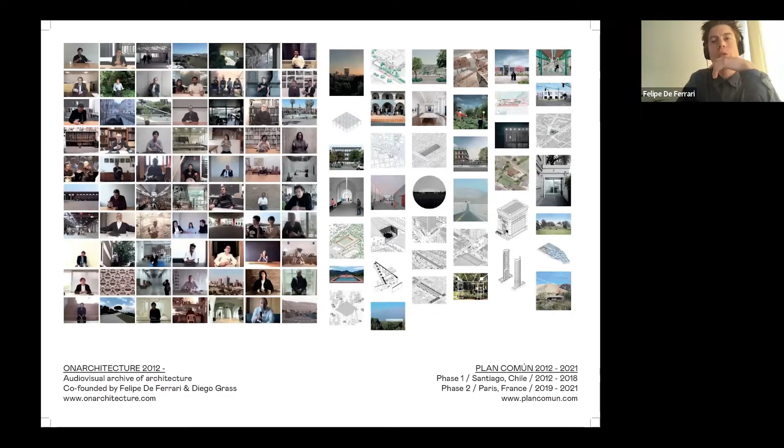So basically, these are two projects somehow: on the one side, a collection of films since 2008, and then a collection of projects we started doing in 2012. As I said, OnArchitecture is an audiovisual archive of architecture.

At the moment, we have around 600 videos. We are producing the last 50 to arrive at 600 videos by the end of April somehow. It's content done by me and another Chilean architect, Diego Grass. As I said, it originally was a student project, and then we continued as professionals, and in a way it allowed us to really approach and get content from first hand.

I would say it's a collection of buildings, portraits, and interviews, all the material produced since 2008. Of course, it has been a super interesting way to approach people we really like, we really respect, and people that have been extremely influential in our thinking.

I'm not talking only about contemporary architects, but also architects mainly from the modern period. And then, trying all the time to enlarge the questions and subjects in which architecture operates—we're not talking only about form, but larger questions. We have been privileged to talk about these questions with many people, with very different approaches and attitudes regarding architecture, from very highly conceptual people to very practical people.

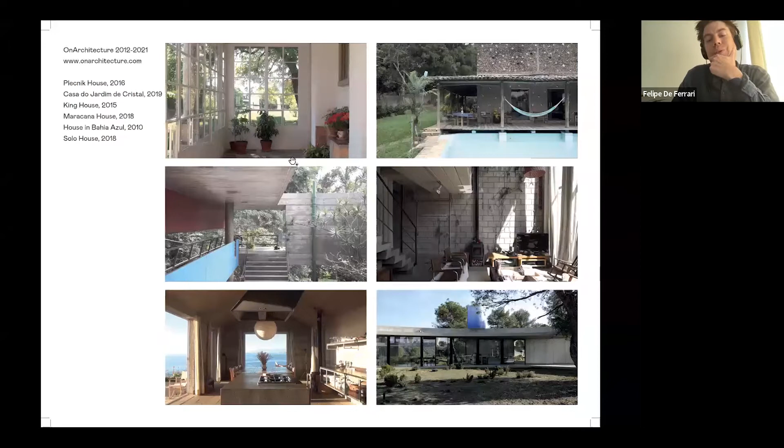This has also allowed us the possibility to visit many places, and to confirm strategies by many architects from South America, from Europe, from Asia, and so on, with this specific interest in collective spaces. This has also been the possibility to look at how we live—in individual houses, but also, especially during the last 5 years with more intensity, how we live in collective housing.

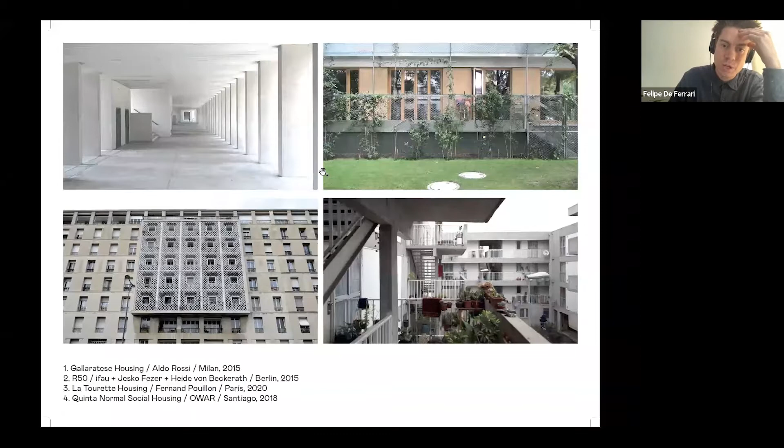This material, all the videos, are available on this site, and I strongly encourage you to visit the website, as Architectural Association has subscribed for the first time during this year, if I'm correct. So basically, that's what we have been doing.

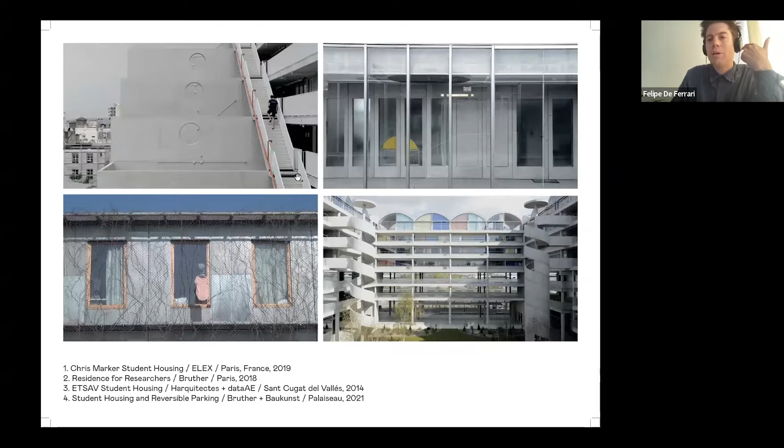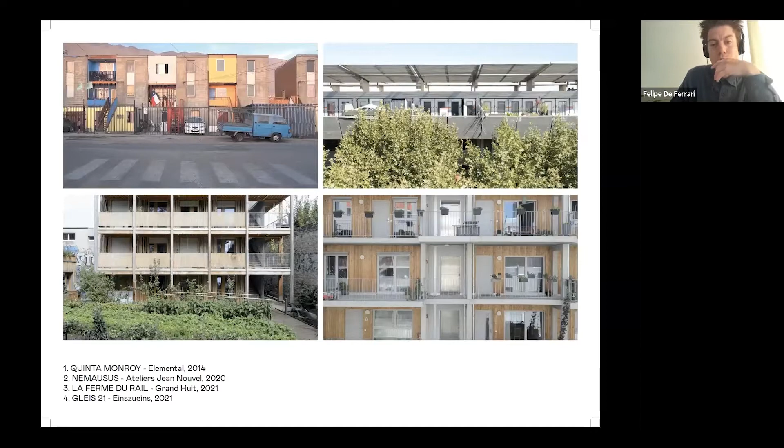During the last 5 years there's been a strong emphasis on housing, and how we live together through many approaches. We have been reviewing and visiting student housing, social housing, real estate housing, and so on—housing in South America, housing in Europe, cooperatives. You already have an idea.

We are also trying to understand the questions and subjects behind some strategies of architecture, meaning we try to really understand the complexity of these spaces, not only from a formal or spatial point of view, but also from a finance point of view, administrative, and so on. There are cases you might know very well.

I'm not sure if Cristina is here today, but of course LACOL has been very important as a kind of practice of our own generation. I still remember visiting the La Borda cooperative when it was a construction site. Then I met Paul for the first time to talk about the process. Then we met Cristina and Carles. Then we came back to see the post-occupancy. So it has been an amazing way to approach architecture and to really see carefully these places, because we spend time there.

This is the basic approach: as we are recording, we spend time, we see details, and we try to do a nice portrait of them. And then, as I was saying, it's also about the conditions.

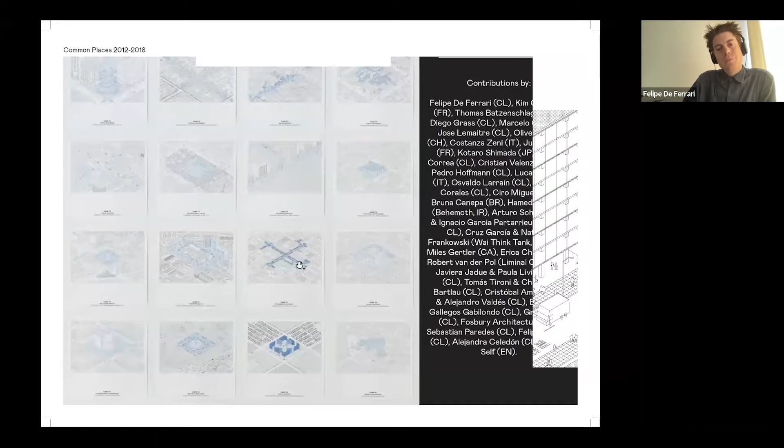And it was a kind of very direct attempt on the question of collective spaces, on how to imagine possibilities for our public spaces and for our collective space, right? So we started this series of 45 strategies that were dealing with many diverse subjects in our cities, let's say, from malls to cemeteries, trying to really improve and reinforce the collectivity through form, through architecture. So we have this.

This was still the first one produced in our studio. It was entitled Public Buildings, and the idea was to really have like squares on air, very simple, as a kind of prototype.

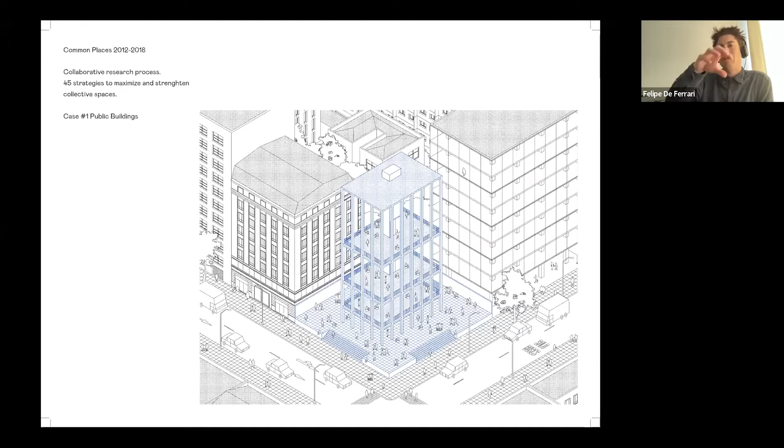And then I have to say also the context, these were not strategies located in a specific context, but everything was somehow created so we could imagine that one strategy could be appropriated and translated in another context, right? The idea was not only, let's say, to say okay, we are architects and we have many ideas and we know how to represent them, but actually...

one of the goals of this research was actually to try to give these inputs to our, well, of course academy, but decision makers and so on and so forth, authorities, in a way to really feed their own parkour and their own universe of possibilities when we are talking about our cities, for example.

This case, for example, I just choose a couple of them, but actually, for example, this one was to create public pools, really swimming pools in the cities without any kind of bureaucracy, without any kind of filter in between the city and the pool.

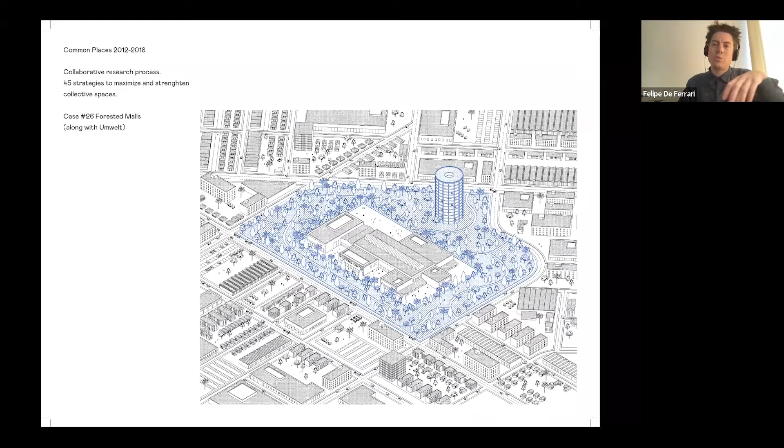Or this one by our friends from Chilean practice Umwelt, where they decided to really transform the area around the malls, which is a typology very present in the Chilean context, but not reclaiming everything, not expropriating the monster, the blind box, but actually trying to transform its surroundings.

This series has been introduced in several places, several exhibitions. The idea from the very beginning was to publish a book with all the material, and we are already in 2022, and we weren't able to do it. But somehow the good thing about these exhibitions is that the material has been continuously shown in different places.

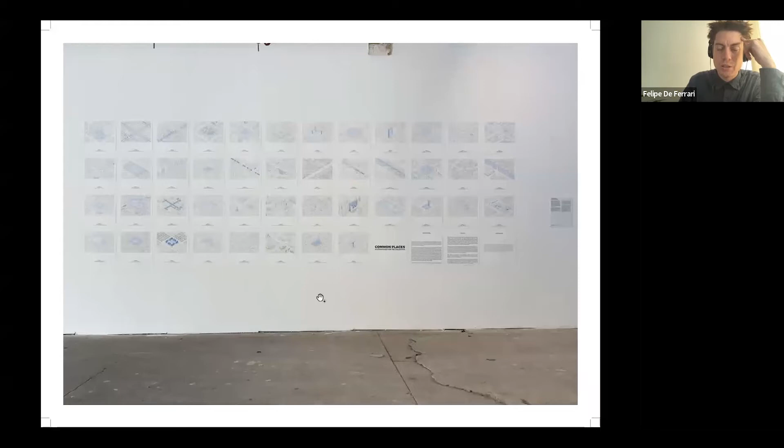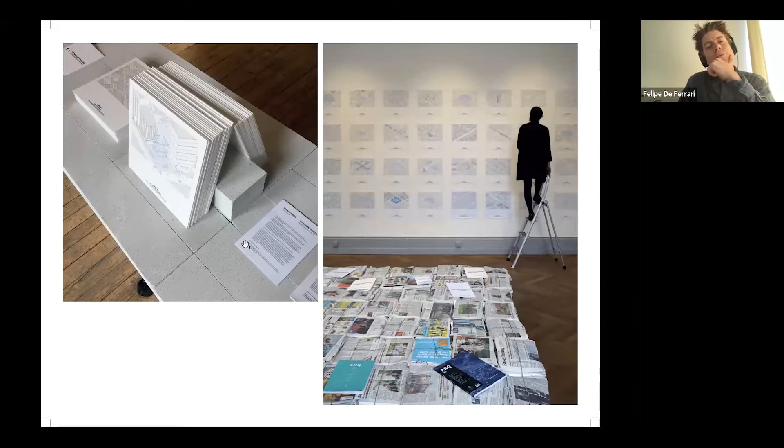For example, this was a presentation we did when we were invited to the Chicago Biennale last year. You can see here on the right the first time they were exhibited at the Swiss Architecture Museum, all the collection, all the cases together. Then on the left, an exhibition we did in Belgrade, showing again the cases and using other means to engage the interested people who visited.

In the meantime, we took this idea, very important at one moment, from Lina Bo Bardi, this idea of poor architecture, architecture able to communicate with maximum dignity through minor and humble means, trying to build a case around the projects, to look for the right strategies, and to try to do almost nothing, this idea of economy of means. So, for example, back in the day, I'll show you a couple of projects made in Chile, and then I'll jump to the ones we've been doing the last years in Paris.

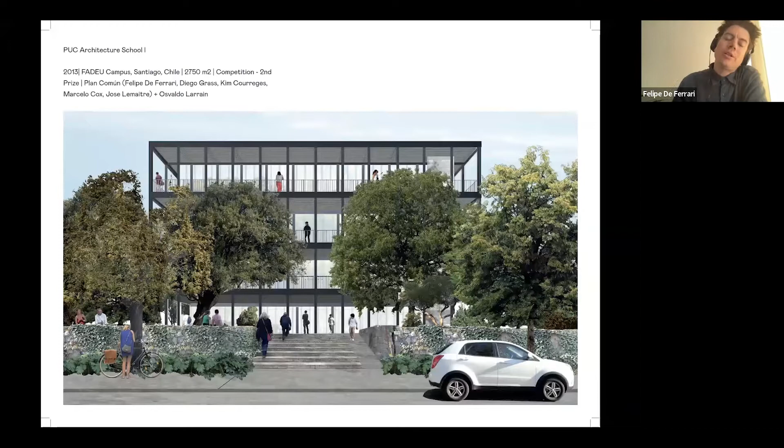This was one of the first ones, very important. It was the first time we got a prize in an open competition, for the new building in our architecture school in Santiago, at the Universidad Católica. What you'll see here is that basically we took directly the strategy by Lacaton and Vassal, the idea of extra space, and we really used it for another subject in Chile, in another context.

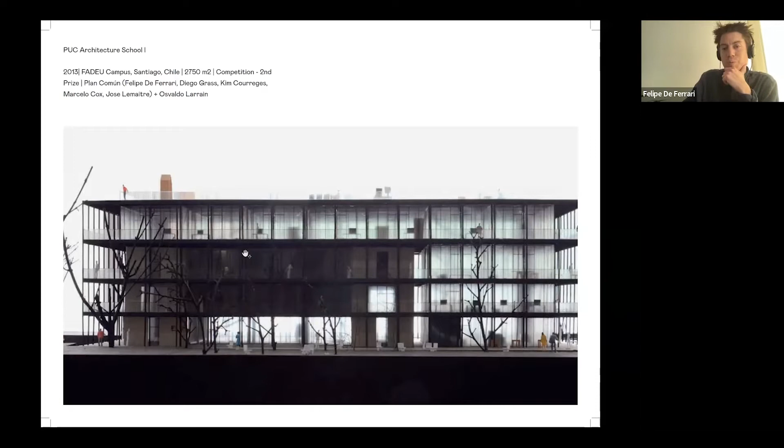The idea was that our proposal, rather than doing a new building as suggested and demanded by the brief, was really to transform an existing building next to the one the brief was proposing. So in a way it was about this translation of received ideas somehow.

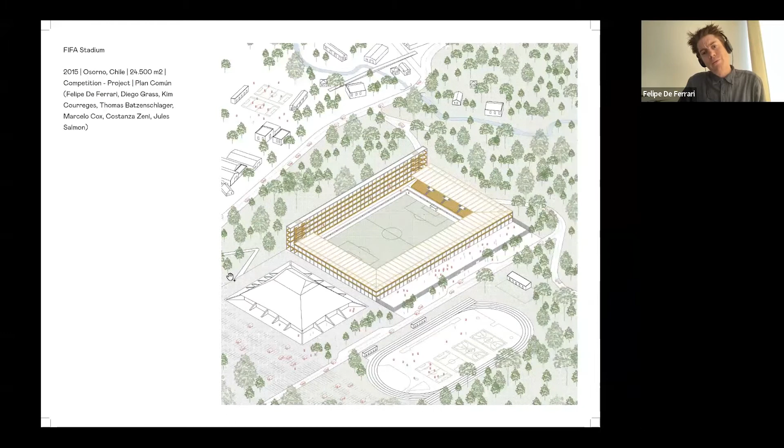This was also another open competition we like a lot, for public facilities in the south of Chile. It was a stadium, and coming back to stadiums, during the first meeting, the first approach to the subject, this model was really in our heads: the La Bombonera Stadium for Boca Juniors in Argentina, a very interesting typology of stadium.

You can see here that you have three sides with the graderías, the seats for all the people, and then you have a bar that somehow has the VIP area for the public, the most important people there, like important football players who were attending matches.

So then we arrived at this idea. Basically it's the same, just translated into another context.

We were proposing somehow this VIP space, but also a promenade all over the stadium, and then the extra space, an idea very important in our work, to offer something more, something else, something unsolicited by the brief. In this case, we were proposing extra gym facilities with views towards the city.

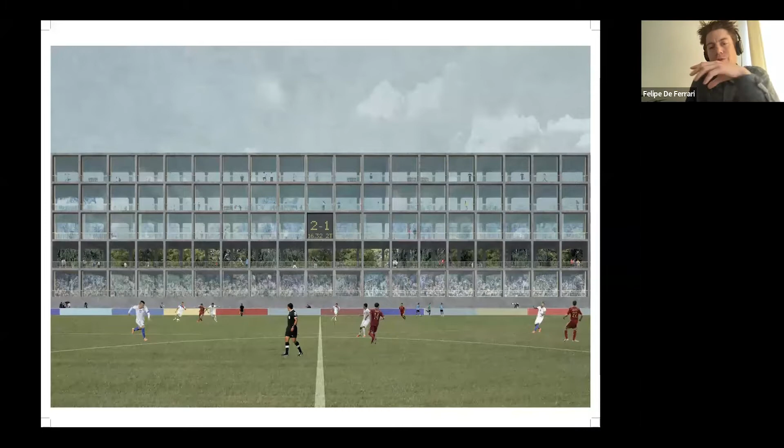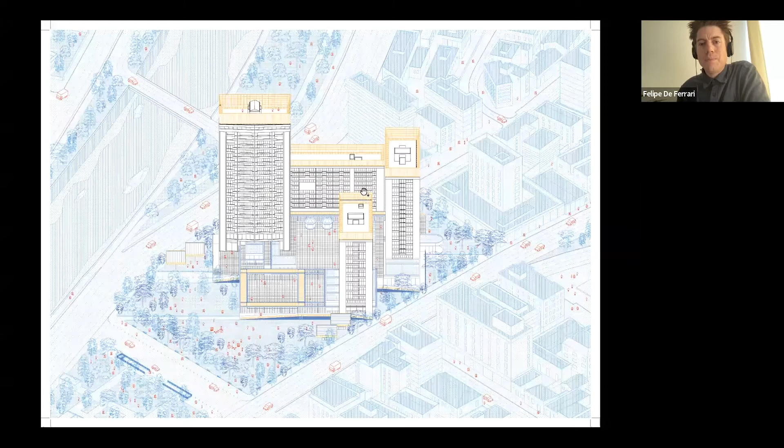And in the upper tower, to take advantage of this new crown, to create a space for the inhabitants there, for the neighbors living in that tower.

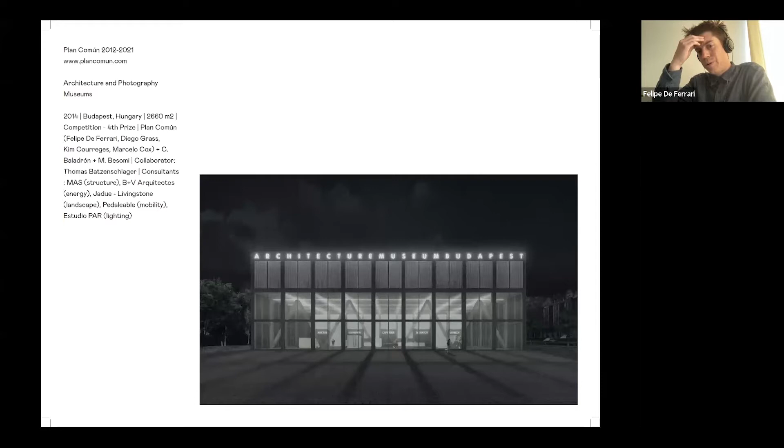Let's continue. In this case, a museum - a very big international exhibition competition in Hungary, in a park called Városliget. We were working on the design of both an architecture and a photography museum. We were finalists, which was also important - the first time we were shortlisted in an international competition. Of course, very important for a very small practice.

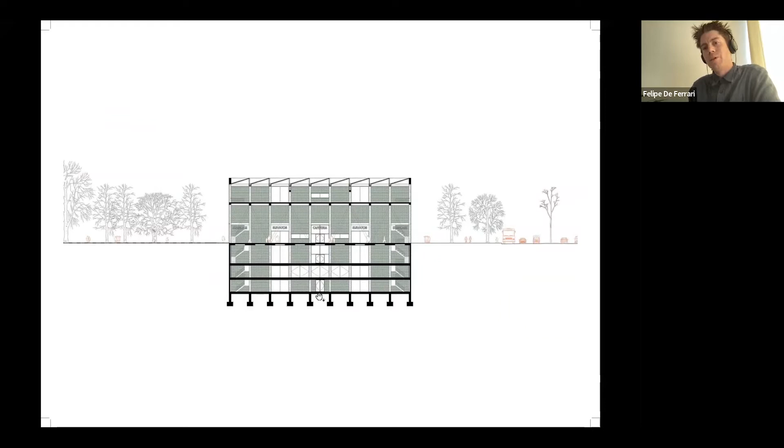So again, the strategy is not the same, but the attitude is. We took all the program demanded by the brief - all the galleries, all the exhibition rooms and so on - and we buried them. We have them all underground, and all the administrative rooms, for people working there, we had in the upper part, on the last floor.

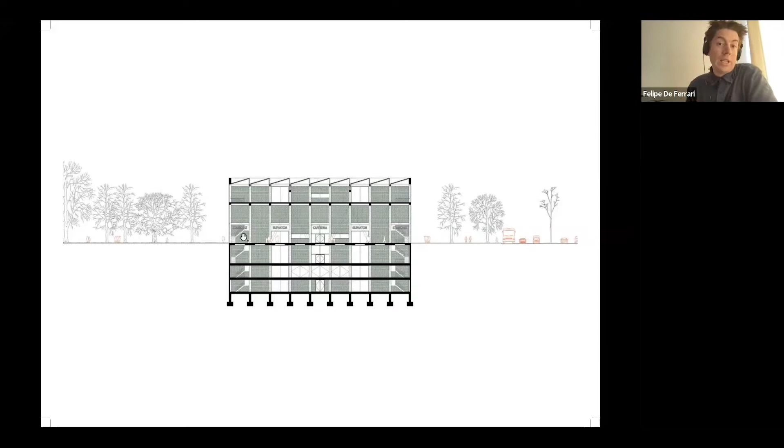And by doing this, we create an extra space in between them, totally non-solicited by the brief, which is this kind of triple-high volume of air that, in our proposal, was really a place for gathering, but also creating connections with the museum in front.

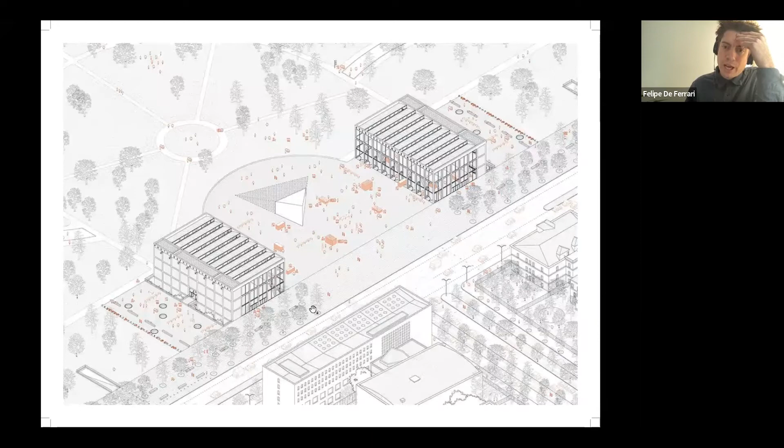And this was something important to say - the brief was really suggesting to have the buildings positioned in parallel to the main avenue. And then we totally decided to have them in front of each other in order to create an extra space in between two buildings.

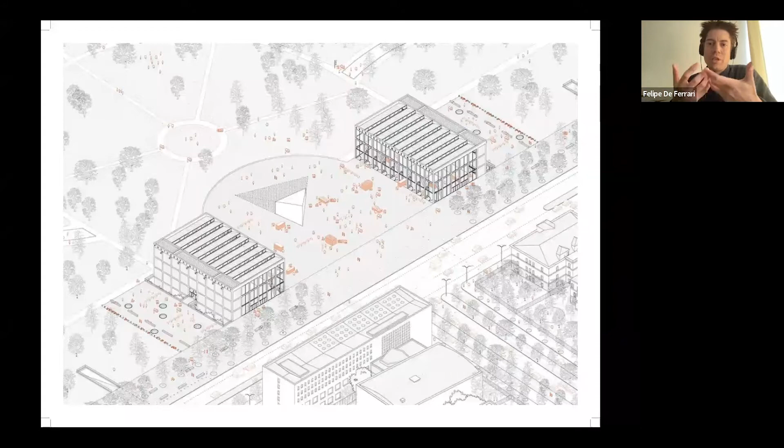So there is a volume of air in the interior of one museum, another volume of air in the interior of the other museum, and then an in-between space, creating something that we were thinking could be a ground where all mix somehow - the exhibitions of architecture and photography can at one moment find a common ground.

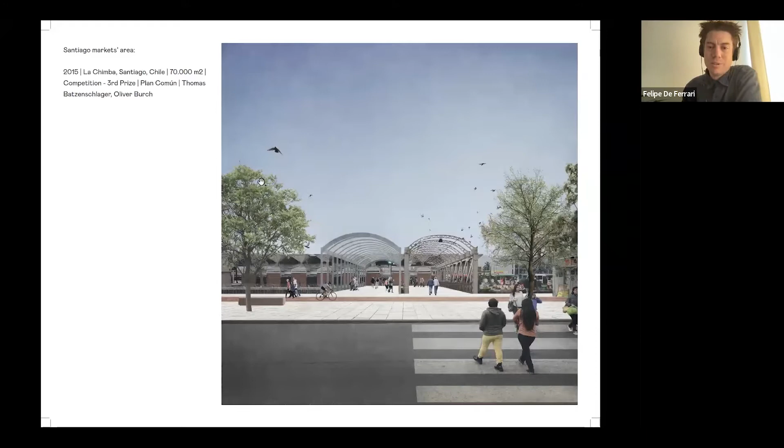We'll continue with another one, an urban project of public space also in Santiago, in the city center. It was called Market Esplanade, and with the name you can immediately understand a little bit - it was creating a horizontal walkable surface in a very difficult place with a lot of people, a lot of transit, and so on.

So we said, instead of trying to create this esplanade, which would be a huge effort, and we knew at that moment it was impossible to pay for, perhaps on the contrary, we can deal with fragmentation, and reinforce specific points in this area, trying to create new relationships with what is there - for example, the market hall or historical buildings - and new social infrastructure that could update the condition of this area.

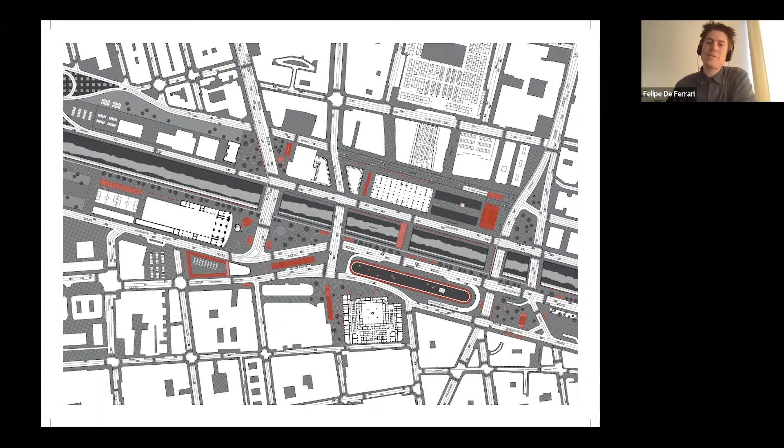So it was really basic, but then somehow effective in the way we were dealing with economy of means, and really with this idea of a constellation, taking advantage of specific situations there—a place, a playground for children, and so on.

This idea of the constellation, to throw something on the fields, we insisted on this idea in a project we did the same year, but in the context of Nove Fuzine, a neighborhood in Ljubljana, Slovenia, a modern complex of around 15,000 inhabitants. What you see here is the Castle, the Museum of Architecture and Design, who commissioned us.

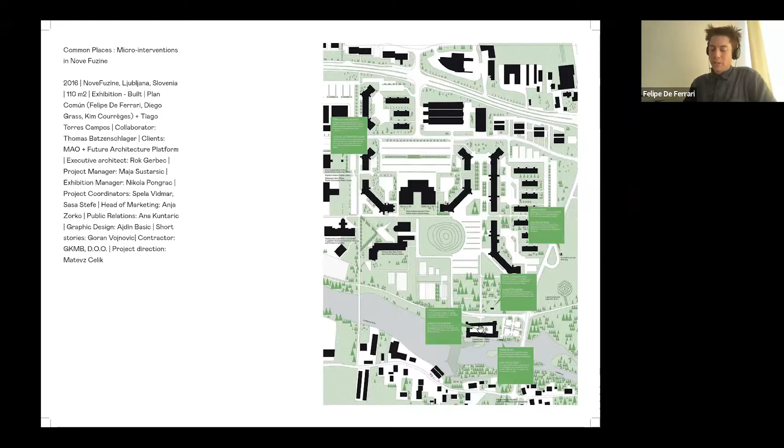They commissioned us to do an installation or an exhibition within the museum. After touring and visiting the place, we proposed to take part of the effort outside and try to create connections with the neighborhood.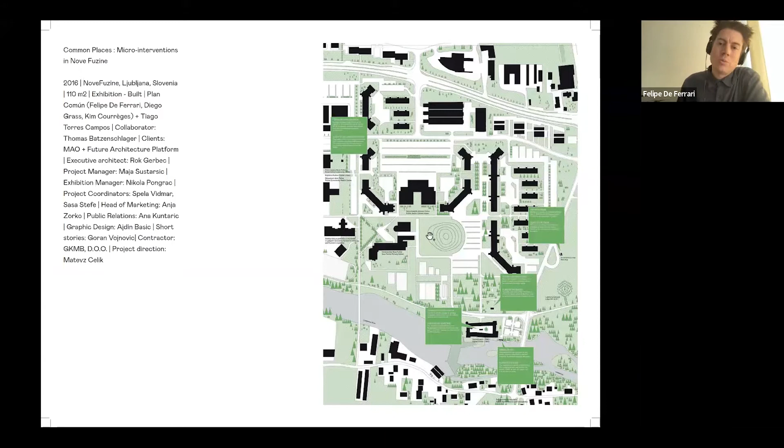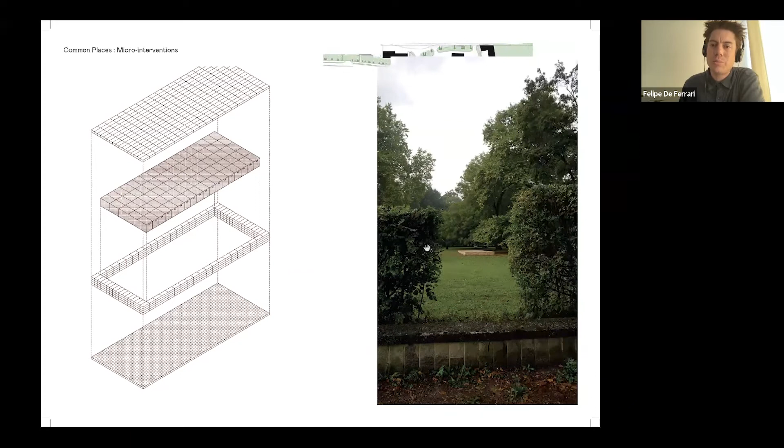So what we did was very simple: a series of five plinths spread and located in specific parts of this context. Let me come back to the map so you can understand a little more.

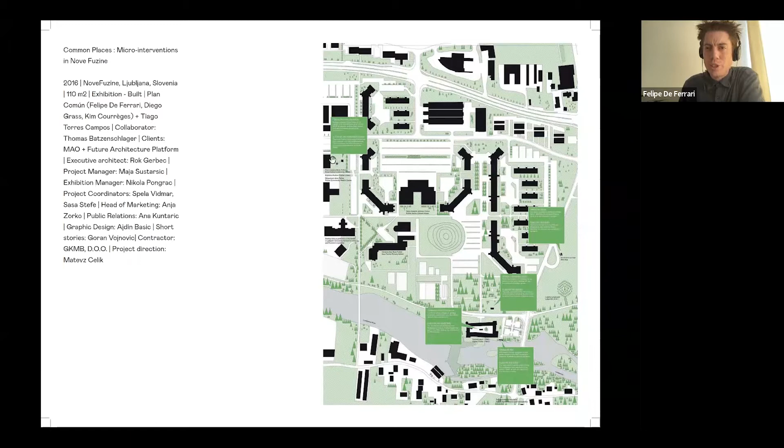There was a small one next to the last bus stop, one in front of the museum, another in the center of the castle, another in front of the community center, and another next to the river.

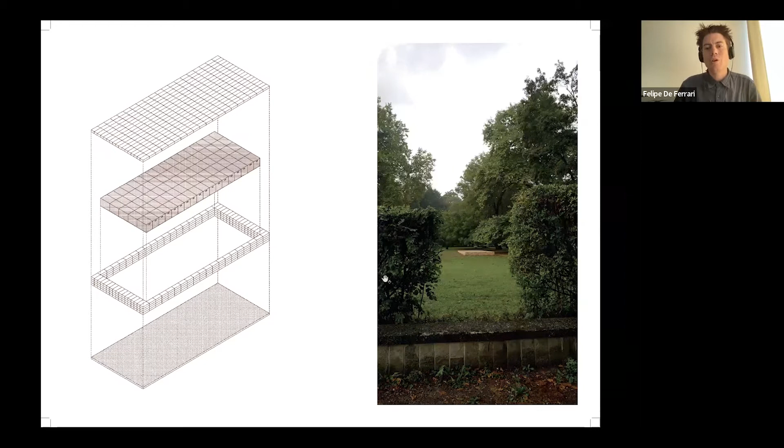All of them used the same building technique, very simple: big concrete blocks in the core, and normal bricks as cladding on the outside, in the perimeter. All of them had different sizes, but followed the same technique.

For example, this one is next to the social community center. And of course, this is totally rough infrastructure, very simple. You can sit there, you can use it for many activities.

At specific moments along the year, they are more intensively used, as in this case with the festival of the neighborhood. Or, for example, the one inside the museum was used as a display, but also as a place for openings and so on.

So let's jump a bit to the title of the presentation after this introduction: this idea of framing commons, especially in this second phase of our practice, talking mostly about housing and transformation.

When we say to frame commons, there are many ideas there that enrich each other. We are talking about the in-between condition, what is between an interior and an exterior. We are talking about this idea by Lacaton and Vassal, the idea of extra space. We are talking also about something which is not solicited as a space or as a program in the brief. We are talking about a space of life and freedom.

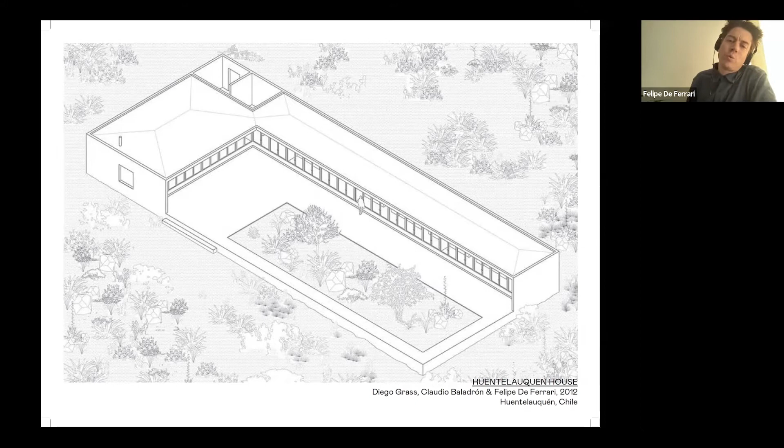I don't remember if we did collective housing projects there, but we did some proposals for individual houses, such as this one, built just before we founded Plan Común, along with co-founder Diego Grass and another friend, Claudio Baladrón.

And then you can understand this idea of the in-between. It is a house in a very nice landscape in the north of Chile. We decided, very simply, to have the collective area on one side of the house, and all the rooms together on the other side.

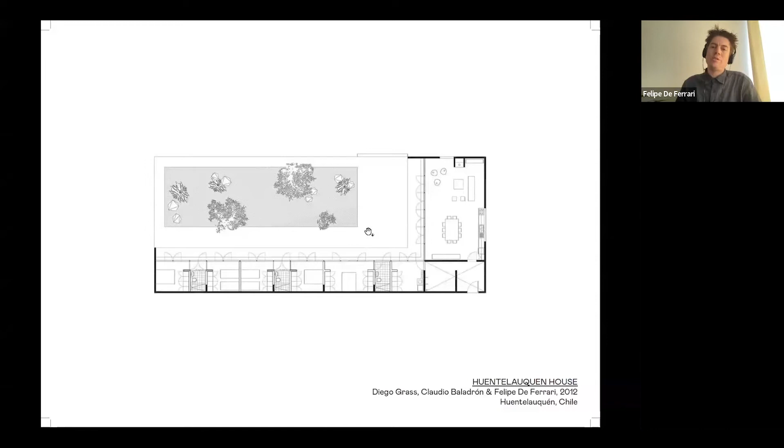But there are no corridors—what articulates everything is a plinth, a terrace, a very generous terrace outside. This is the place: a huge, somehow overscale terrace in front of a rough surrounding context, and we had this sand pool just to enjoy the sun and so on.

So it means that to go into the house—if you wanted to go to the kitchen, you needed to pass through the exterior, not through a corridor in the interior.

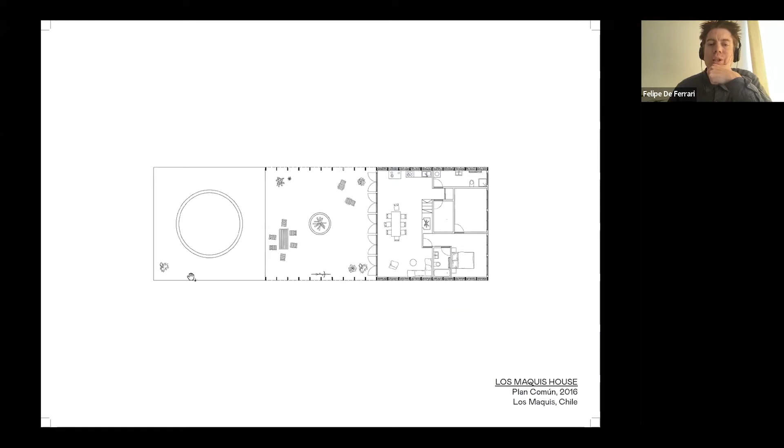This idea was somehow the same idea with a different form and proportion and so on. We applied for a house in the south of Chile. You can see it in the plan: you have very compact interiors, then an in-between space, basically an overscale roof, and then a total exterior, which was the terrace and the pool. You can see it a little bit over here.

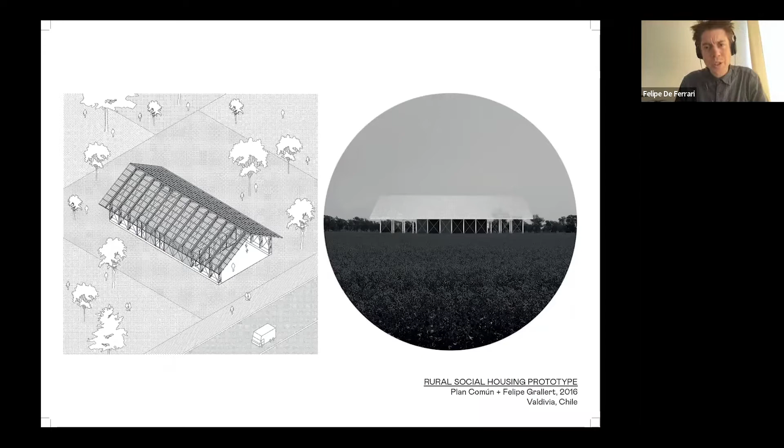Or even here, which was a social housing prototype that another Chilean architect, Felipe, commissioned us to do, where we were repeating somehow the same ideas: a very compact interior, leaving two extremes of the house open but covered with a roof that could be transformed into a store or something like this. But when moving to collective housing, we have some very clear things to answer.

So the context - I'll be very brief on it - it's about this reality within the global neoliberal framework. We are all aware of this: a housing crisis during the last decades, a huge housing deficit, not only in European cities but let's say everywhere. And then the last question is the housing after pandemics, and what pandemics showed us in a very hard way about the situation of housing.

So on one side, we have this idea that we are at the mercy of the protagonists which has nothing to do with planning and design - let's say real estate and speculation.

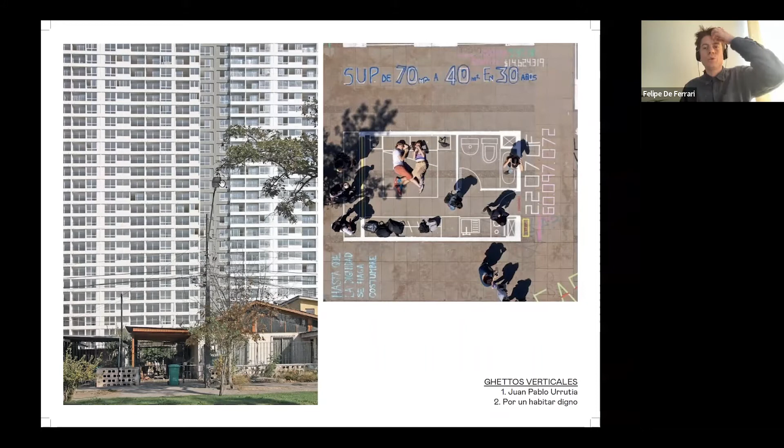This was part of a dialogue with German architect Jesko Fezer. You can see it a little bit here. At one moment in Chile, some years ago, we started to talk about vertical ghettos, which were really small units of housing, a consequence of pure speculation. So investors were buying several floors and then renting to really fragile people, especially immigrants, for example.

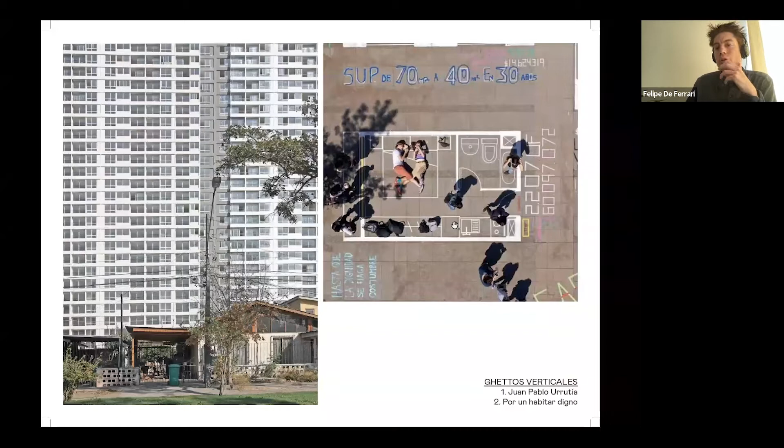And then on the other side, you see this very smart action performance by a series of architects and students of architecture during the demonstrations back in 2019, where they did the survey one-to-one in the main square, Plaza Dignidad, where you were seeing clearly the lack of space and all the contradictions of the housing offer in Chile at that time.

But this question of speculation and the rise in the value of housing is a problem in all of our cities, in all metropolises probably. There are a few exceptions, of course, but this is mostly the case all over.

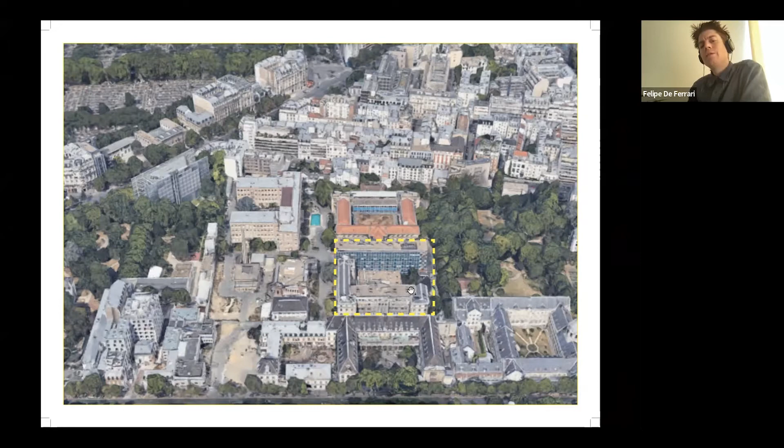But we did a project for this area. It's a kind of hybrid between an urban block and a series of detached buildings. Probably the biggest challenge was dealing with the density there—it was quite high, 185 or 186 apartments plus commerce plus workshops, so quite dense as a compound, as a complex. So this is basically the form.

It's a collection of buildings, all following the same type of constructive system, with a patio in the center, which is connected to the pedestrian boulevard over here.

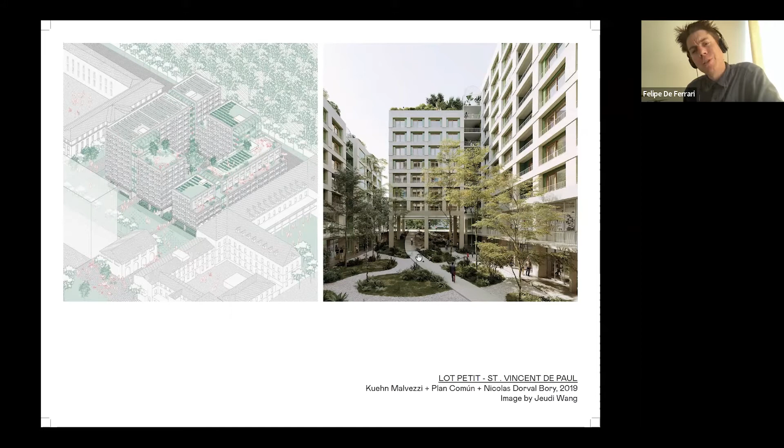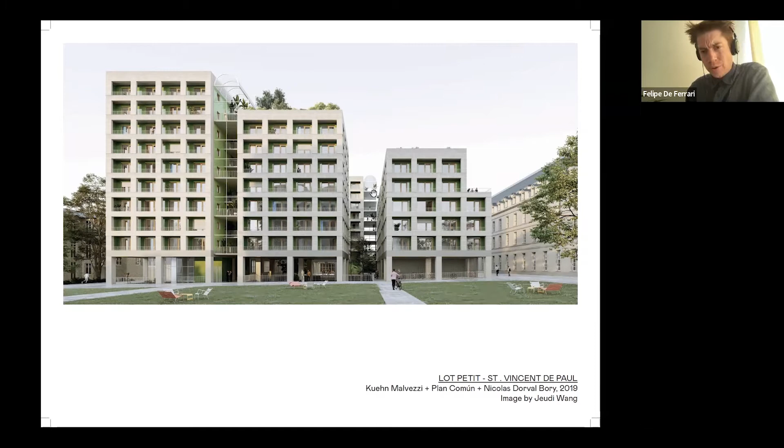You can see here it's a very massive project. The idea was to do everything on the facade. The facades are in stone, which is working structurally. But perhaps most important for this presentation is this type of spaces, the cutouts we have in a series of places in the complex.

When doing the competition, one of the first things was to try to understand or insert our project in a local tradition, the French or Parisian tradition. We visited and tried to understand two different models. On one side, the work by Fernand Pouillon, French architect, in the Victor Hugo residence in Pantin, north of Paris, which is about using stone and a massive type of architecture. Then we came back to the idea offered by Cité Napoleon, where the circulations were something more generous, a real place for life in between for the different neighbors.

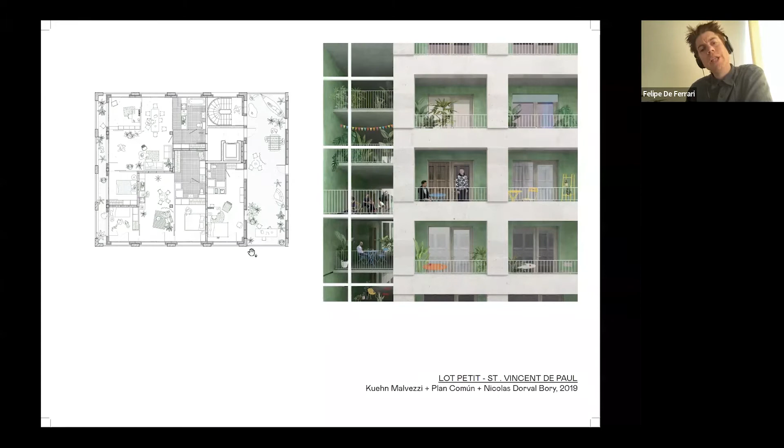Dealing with both, we arrived at a kind of hybrid where we created the building, the compact, massive building. For example, in this square, this was one of the buildings, the detail. Then you had the circulations within the building, and what you have here is a series of platforms, open or closed, which were really open platforms for different uses.

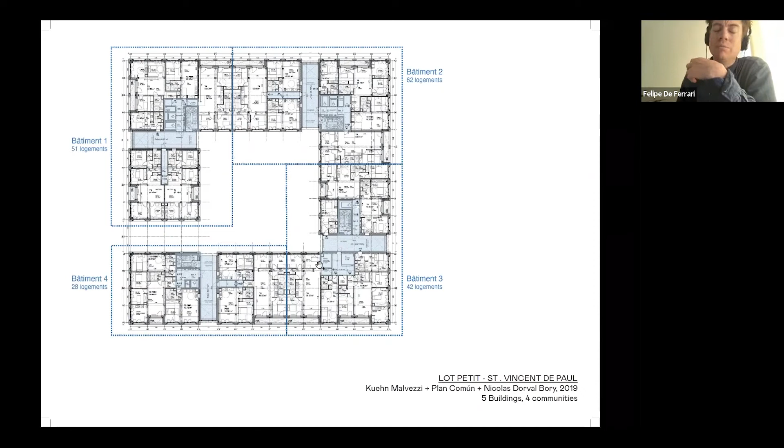What was very interesting for us is that we were not talking about one building equal to one community, but that this building and this building were collaborating, having this in between, a place for the encounter of neighbors of two buildings. Even though it was quite dense with a lot of apartments, we tried to insist on the idea of micro neighborhoods, with a quantity of apartments where people can talk to each other without necessarily having conflict.

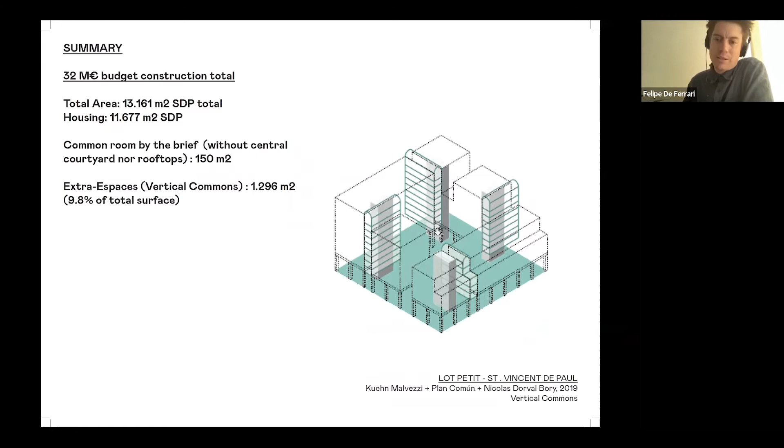In the end, we're talking about more or less 9% extra surface. This is tricky when you deal with this type of stats, but it gives an idea of the extra space we were adding. This was undemanded and totally presented as vertical commons, something really extra in the project.

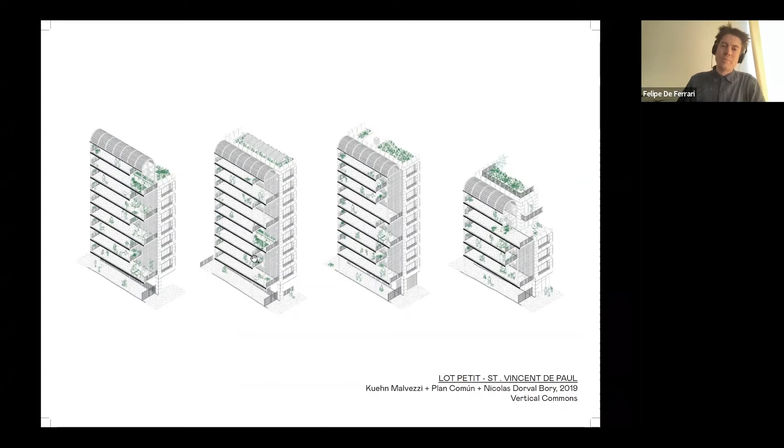You can see here the detail of the fourth floor. The idea is that you have a series of double height spaces, like small rooms, with one side of the facade closed. In the beginning, for the competition, we were enclosing both sides, but these are spaces which are very challenging for administrations, for issues of security, fire safety, and who will run the spaces. Administrations can sometimes see them as spaces for conflict instead of spaces for opportunity. So this was also part of the process designing these spaces.

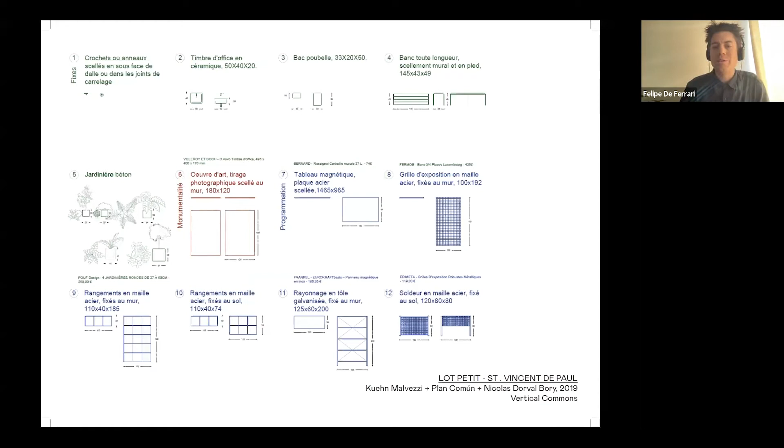You're seeing here the collage we did for the competition, showing the last floor of one of them, where we were not asking too much of the neighbors, but to leave a couple of plants and share a table between two apartments. We're not animators and not super interested in defining everything, but we understand we need to offer basic infrastructure to encourage inhabitants. We were proposing small devices in tune with the programming, with the activities the future inhabitants want in the place.

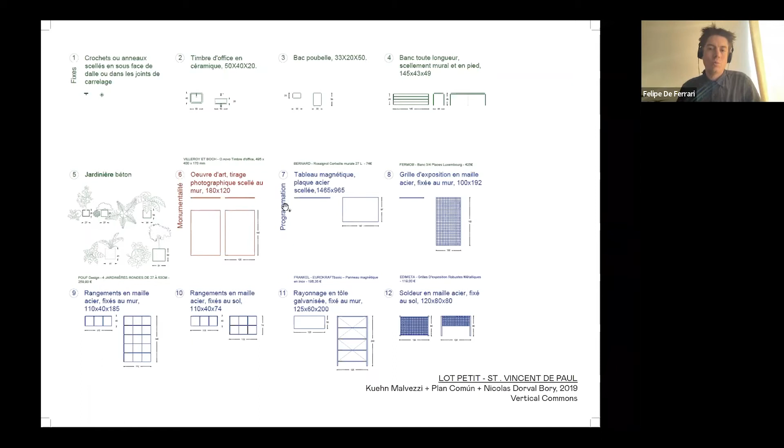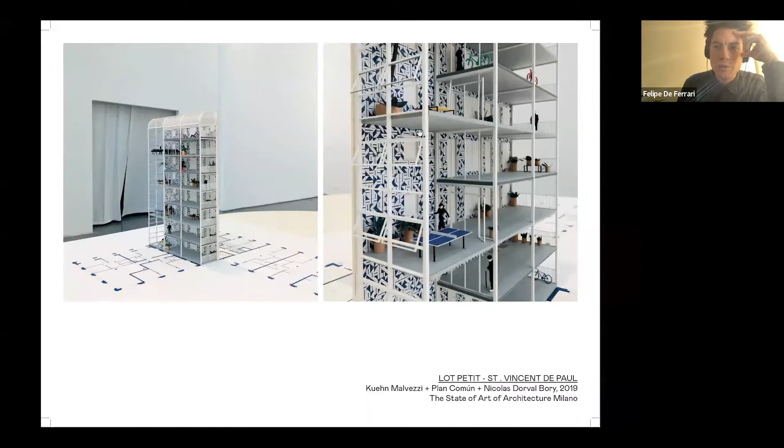We even did this model for an exhibition at the beginning of 2019, where we imagined the uses of these vertical commons. You can see there was another type of definition for the walls, but this is not important anymore.

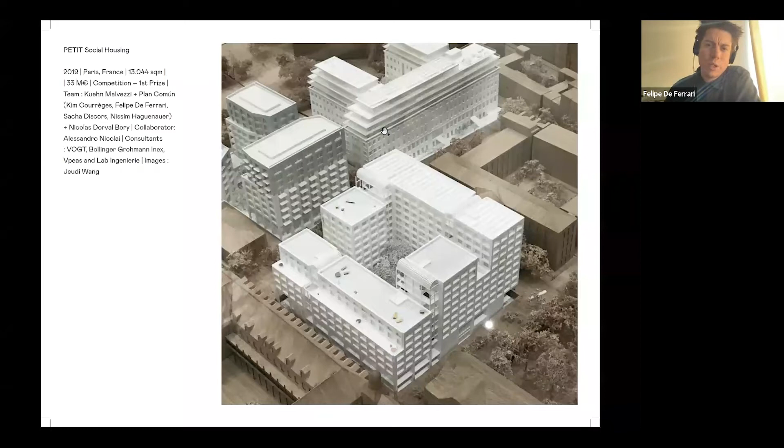You see here the model of the whole complex. This is our project, and this one is a project by a French practice called Bourbouze & Graindorge, along with Sergison Bates. This one is a transformation by Lacaton and Vassal, who won the transformation of the building, one of the few buildings the organization keeps.

Let's continue. This project is about the transformation of an existing building. It's a very nice competition by another public institution called Paris Habitat. We arrived finalists in this process, selected among 4 along with 3 other practices. Unfortunately, we arrived second - we were really in the final. That's why we say second prize.

But even though, perhaps this is not totally official, we associated with the Belgian practice 51N4E for this transformation. It's about this tower - you see it here next to the Périphérique, the ring road of Paris, and also next to the train lines that go to the north.

So basically a quite amazing urban and difficult, challenging spot. We are talking about a building done in the 50s by a French architect and urbanist called Raymond Lopez, a guy who did a lot of housing, around 1,500 units in Paris - very, very important. And what you see here is the very bad state of the tower at the moment we did the competition. This was a rehabilitation during the 90s, if I remember correctly.

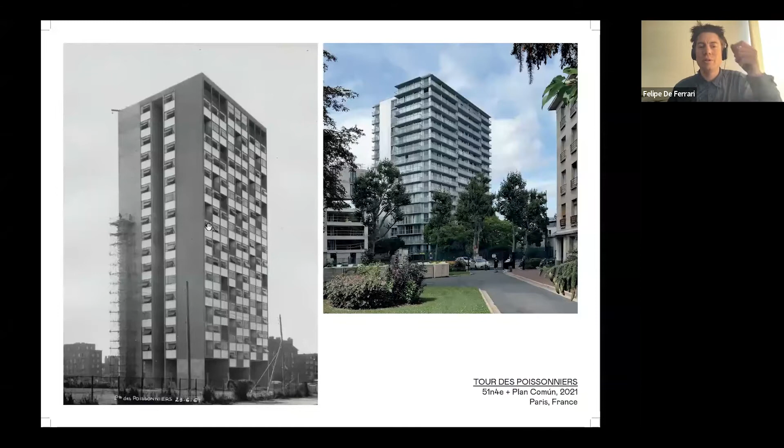Raymond Lopez was also the author of the tower transformed by Lacaton and Vassal and Druot back in 2011 or 2013, some time ago. What's most interesting is that Paris Habitat was the commissioner, the client for the transformation of this tower by Lacaton and Vassal. And after around 11 years, they proposed to transform the second one, which is Tour des Poissonniers.

So basically, we took the idea of learning from Tour Bois-le-Prêtre seriously, and we really tried to clarify our position regarding pre-existences. So the first idea or action was to really deal with the existing, and we decided to remove a central lift that was somehow cutting the relationship between the two extremes of the building, the circulations. There was the lift, to move the lift, and then even to use the original shafts, because you have asbestos.

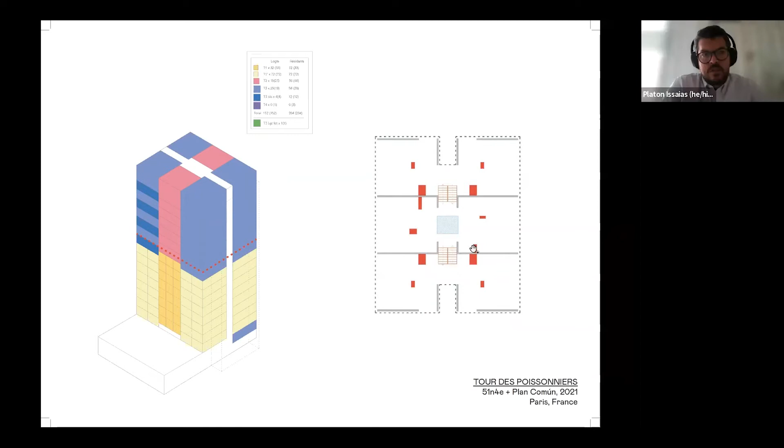Asbestos, yeah, or amiante in French. So basically, we were using the same shafts in order to take what was there and try to fit the new requirements into the pre-existing volume. And then, of course, this idea of adding extra space for the collective, trying to unfold some kind of attitude towards the collective.

One very important thing is that the transformation was from social housing to student housing, plus facilities for La Sorbonne University. So the program, the type of inhabitant, changed already. This was something to consider.

So basically what we did - we come back to this idea of a very challenging place because of the noise, the pollution, and so on. What we decided was a very clear, direct proposal, where towards the south and the north we had spaces for the collective, for the different inhabitants. Towards the north, a series of winter gardens.

Towards the north, which is let's say the neglected side of the city somehow. And towards the south, balconies and terraces. Then to both east and west, we had extra spaces for the apartments. You can see it here.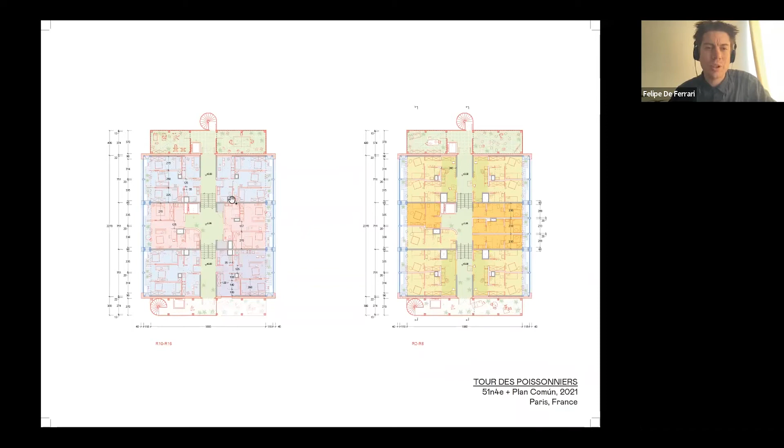I will not give you all the details of this proposal, but you can see that we were also testing apartments where we share kitchen, and there were many different strategies in order to gather people somehow, creating a clear connection between the north and the south - taking advantage of the new circulation we needed to include in the building to create these extra spaces for the collective.

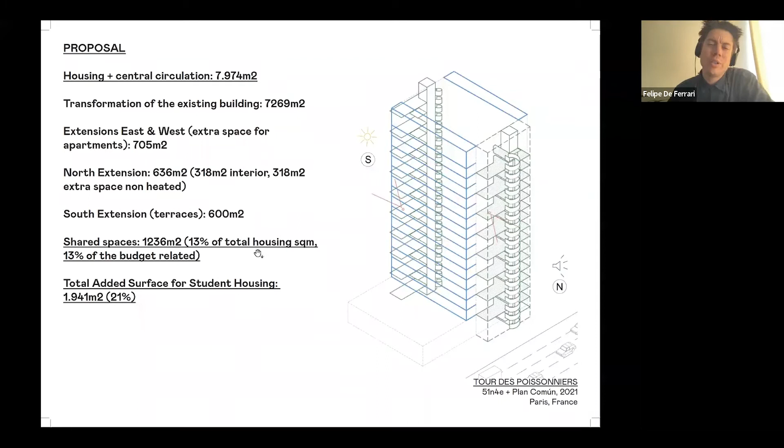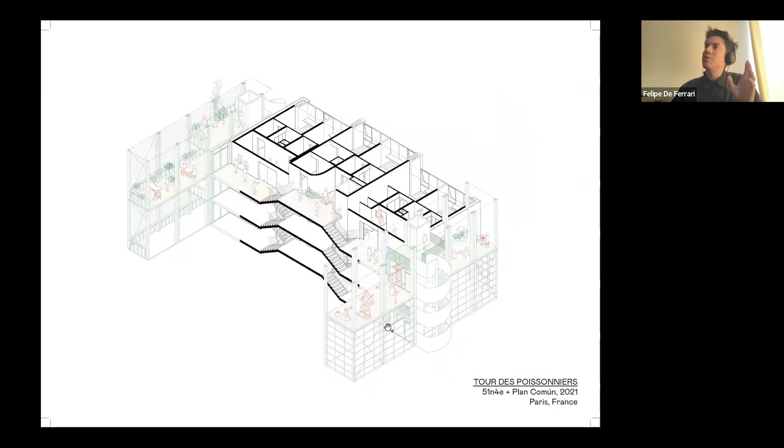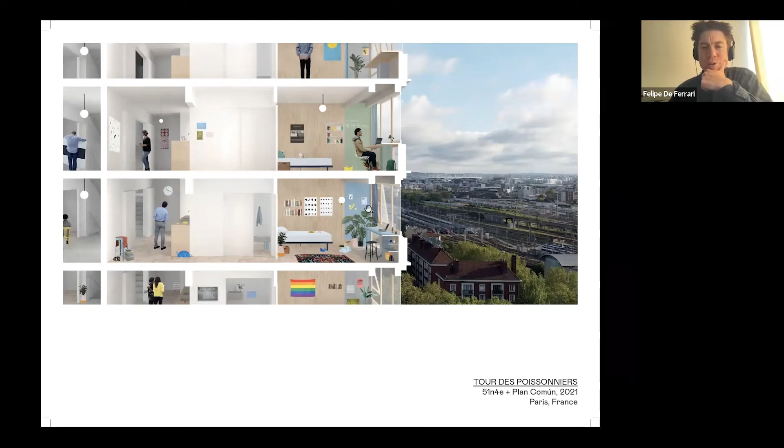So we were again talking about this idea of micro neighborhoods. We were not imagining that all the people of 151 apartments are all friends, but that you have small units within the building, small micro neighborhoods within the total building. You see the connection here between the greenhouse and the balconies, the extension for the apartments where we needed to take out the original facade, and here the series of balconies and terraces towards the south.

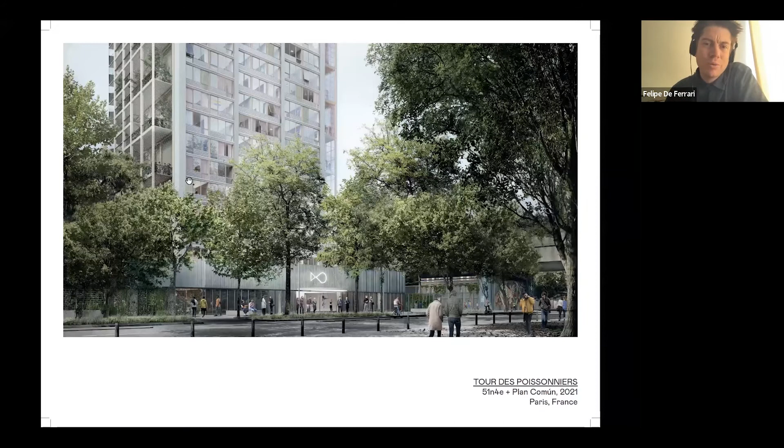And then you see, on the two sides, towards the north and towards the south, this kind of scaffolding that you add, and it somehow defines all the character of the building, of the transformation.

We were imagining this very contemporary situation, a very urban privilege within our cities, to be exposed almost without any filters towards the city, playing ping pong or doing whatever, something different according to the different levels. You see it here, basically.

This is also important: part of this program was demanded by the brief, for example a library or a place for cinema. Some program was really demanded, and we added extra spaces all over the height of the building, creating spaces for the gym, or for a place where you can cultivate vegetation, or even the laundry room for the students.

I will not give you more details about this one, but of course this is an idea we are insisting on a little bit.

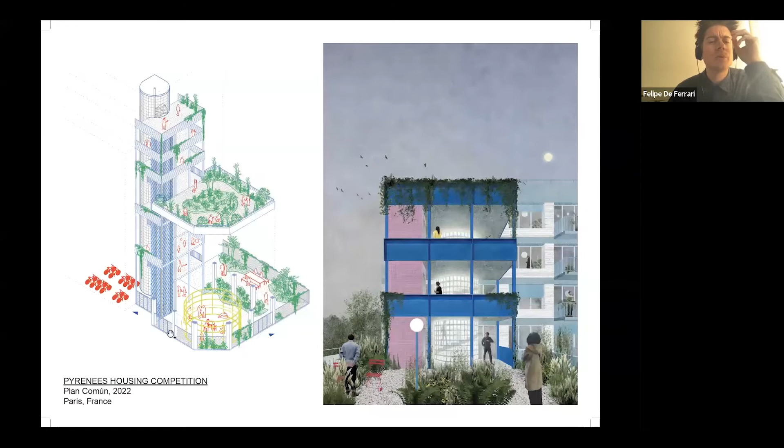In this case, it was a real estate competition, and the idea was how to link, starting from the ground level through this kind of vertical commons and terraces, when you go higher. Let's say it's a kind of open parkour, connecting two different buildings, a low one in the corner and a tall one in the background.

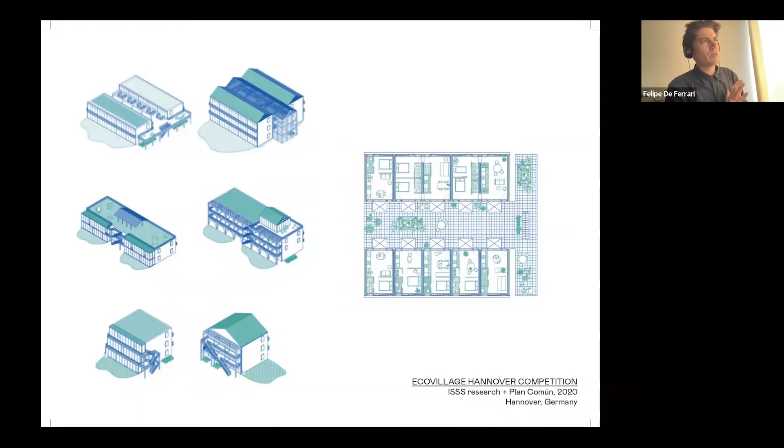With this I will finish, because you already saw our interest was about these collective areas within buildings, but we are also coming back to this very nice social housing project in Valparaíso, Chile. We are very interested in the spaces between buildings as well, and this is much more difficult to deal with from within architecture, because we are normally dealing with one building in the city and then the pre-existing condition.

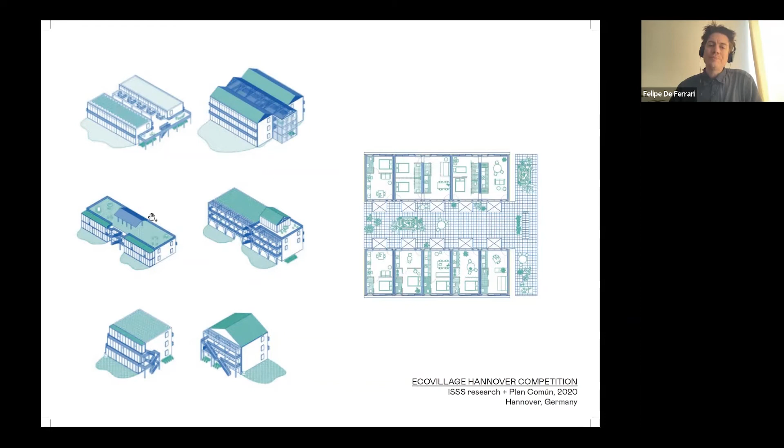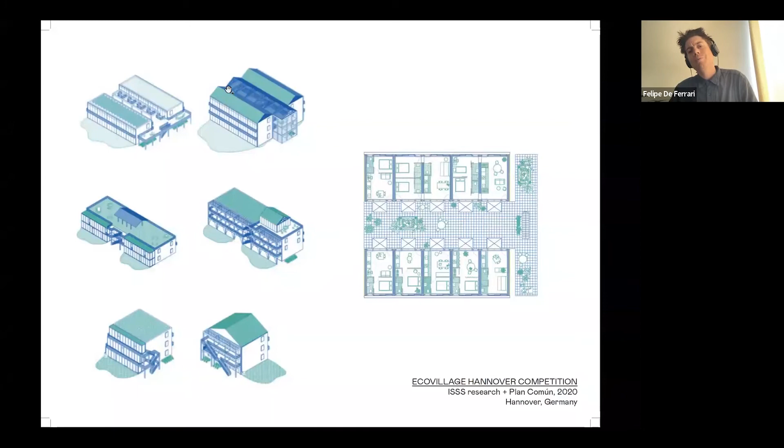But then we had the opportunity to do a very nice competition with our friends from ISSS Research and Urban Planning Practice Urban Studio in Berlin. The idea was a competition for an eco village in Hannover, in the outskirts of Hannover. We developed a series of different typologies with similarities and differences, offering the same type of in-between space, related to the scale of the different buildings. Sometimes they were greenhouses, sometimes open air platforms, and so on and so forth.

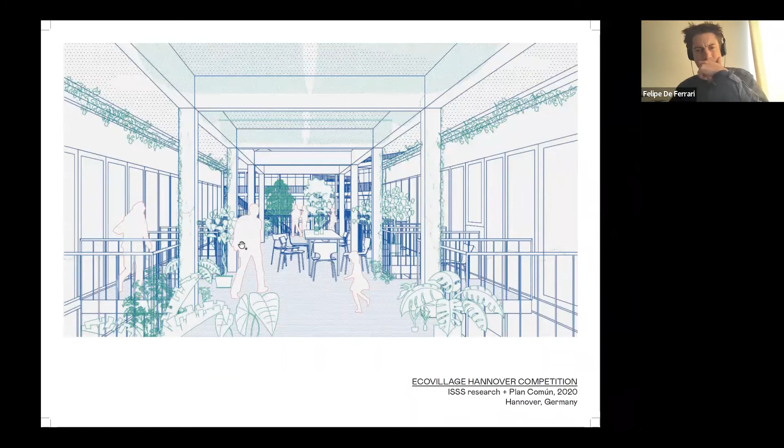This was somehow the M typology, the one we developed further. The idea was coming back again to this idea of Cité Napoléon, but having a larger space for the encounter of the inhabitants, really as a kind of long terrace in between the apartments.

The idea was to create a new kind of relationship in the neighborhood through these different typologies, so in-between spaces that were in front of the building, sometimes in between two buildings, and so on and so forth. That is the final result.

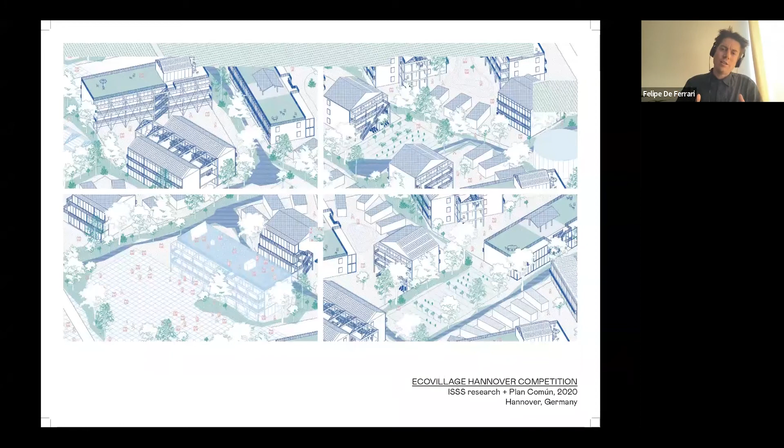It was about 500 apartment units in the outskirts of Hannover. I will not give you more details, but we played with the grid in order to create a hybrid between what was there, the order from the city, and then a new situation at the limit of it.

Thank you very much.

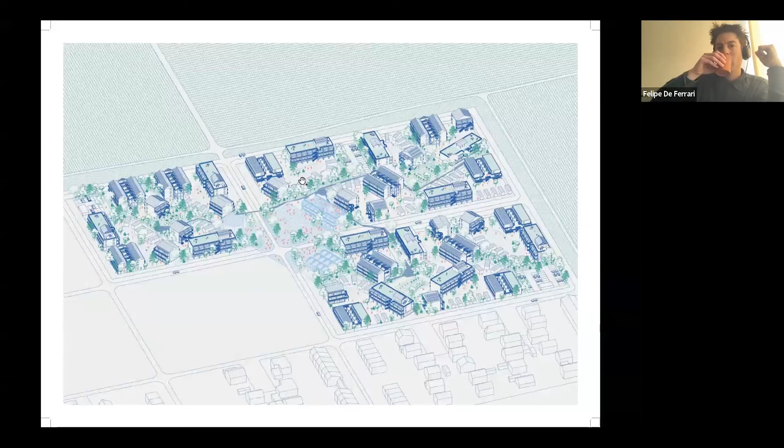Thank you, Felipe, this was amazing. Thank you so much.